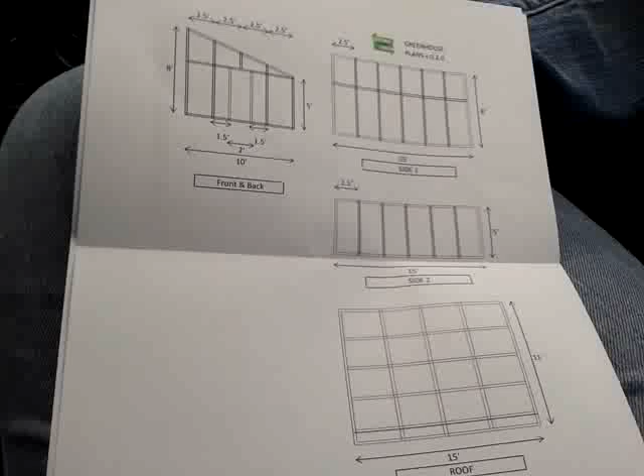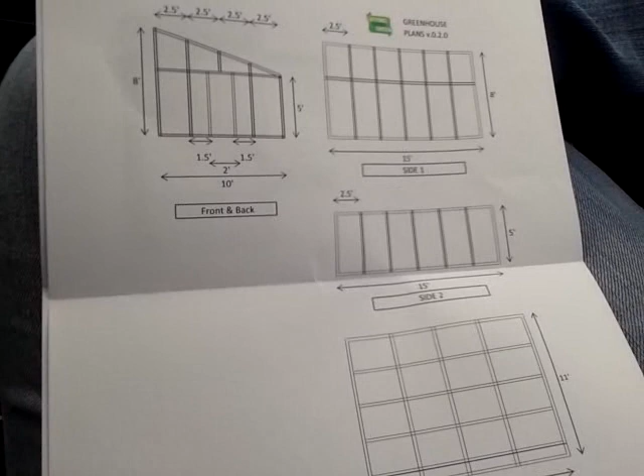Okay Randy, we're looking at some plans here. Can you tell us what we're looking at? Those are plans to our new greenhouse, a more permanent structure. With the old greenhouse, we're taking it down and rebuilding it as a permanent structure. Yes, and these are the plans.

Okay, where are we off to right now? Well, we're going off to a few places like Lowe's, Rona, and Home Depot to look at lumber. We are going to be getting lumber today. We're just going to go to whichever place is the cheapest, of course.

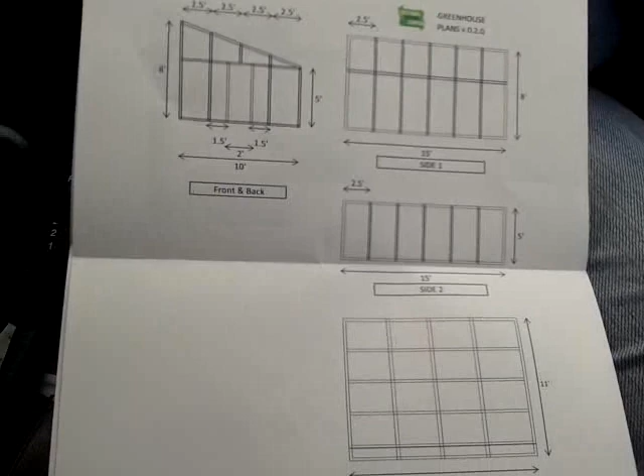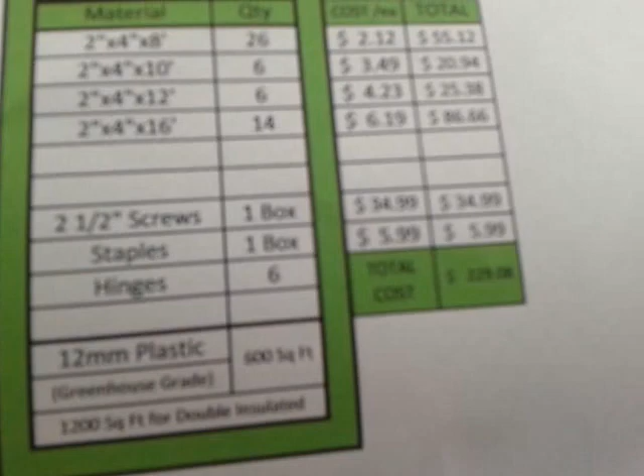Okay, we already sort of priced it out, right? Yep, those are prices at Rona from a few weeks ago, but wood prices change all the time. That gives you a guideline of what the cost of a permanent greenhouse is, if you're building it yourself out of lumber, plastic, screws, and everything else. So just over $200 is what we expect we're going to be paying today for lumber, screws, and all that stuff. Yes, that's what we expect to be paying.

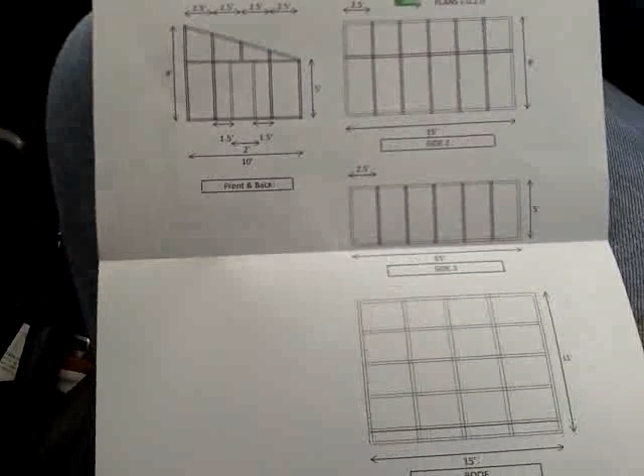Now, we do have some items which aren't on the list. We already have some of those items, so for somebody starting from scratch, we have hinges left over that we're going to be using on our new greenhouse structure. If you're looking here, show them where the roof is.

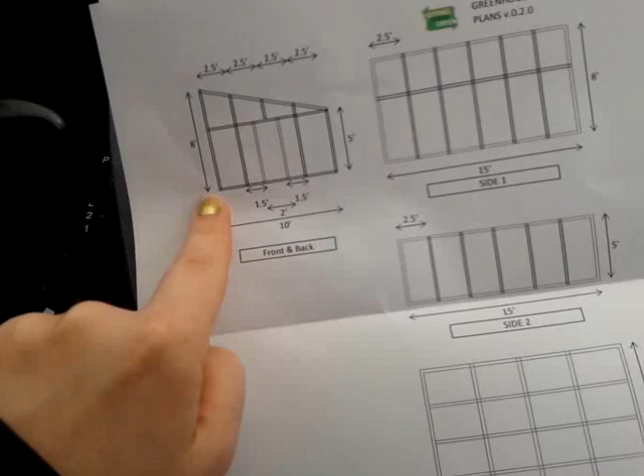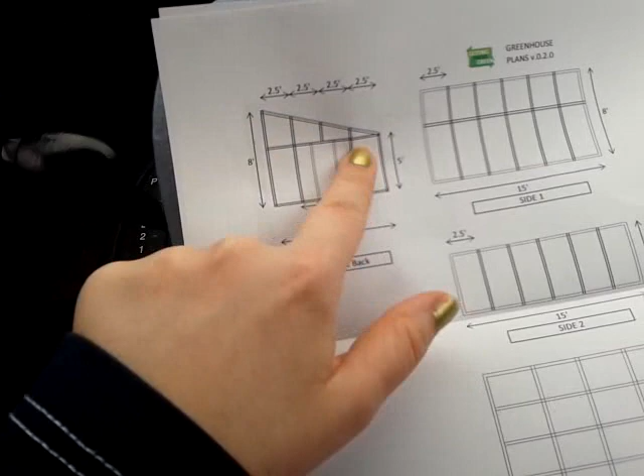So this diagonal line here is our roof. This is the front, looking at it face on, like where the doorway is. So we have one angle, rather than the peak triangle shape you're used to seeing on a house. Ours has one angle, that's it. The reasoning for that is because of the sun, which way it's coming up. It takes advantage of the sun, because the sun spends all day on this side, so it would be a waste of sun to bother putting a peak on the other side.

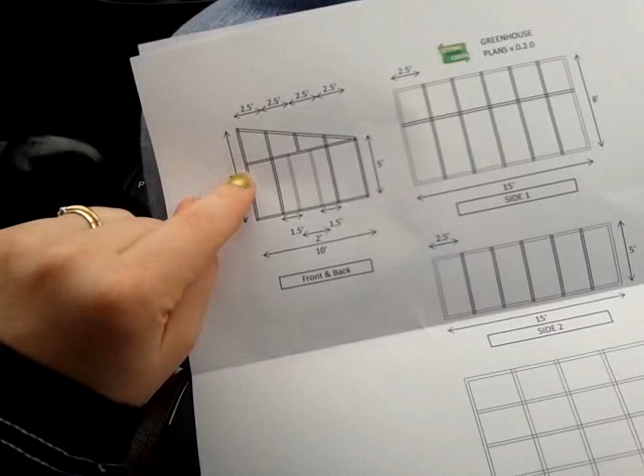And it makes it easy for water collection at the bottom when it rains. And right here, you're talking about having it open up at the top, the highest part? Yes. So there'll be a hinge over here, and it'll open here, for airflow and ventilation, etc.

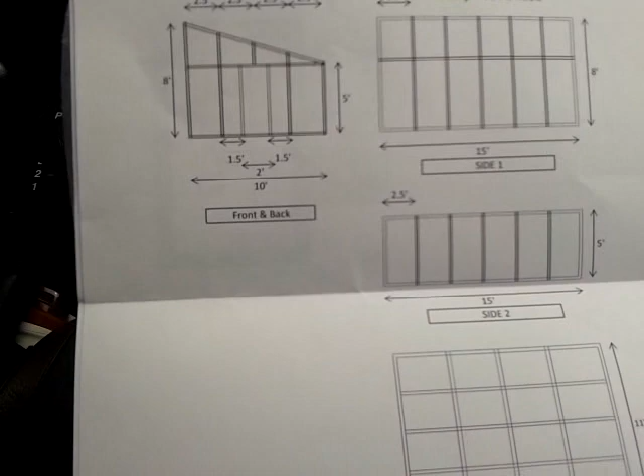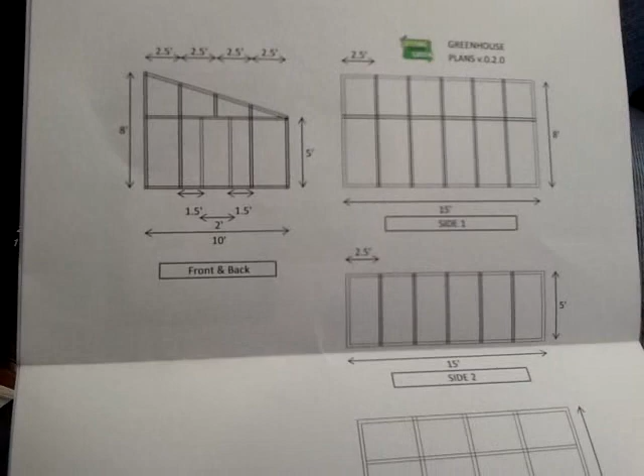All right, so that's the plans. We will make the plans available to you on our website. Once we've completed the greenhouse, we may make some minor modifications to these plans, and you can download them and build your own. We'll add all of the items that you need — this is just what we need for our project, but we'll add the other pieces at the end so you have a more complete list. You can certainly download that, take a look, it'll be in PDF format for you.

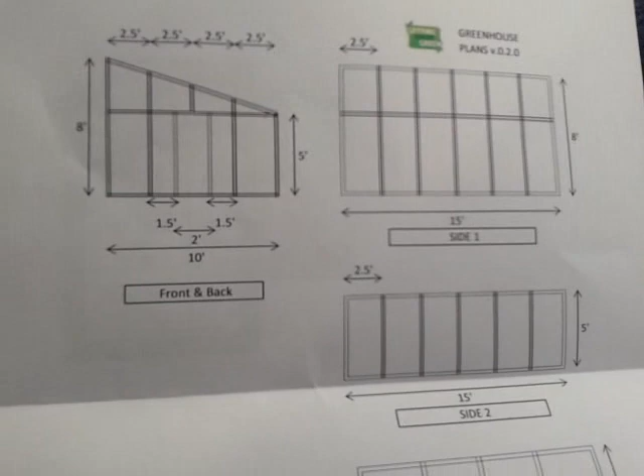You kind of want to look at a lot of different ideas when choosing your greenhouse style. As you can see, the last 2 years we had the PVC hoop house style, and it worked, which is why we've chosen to build a permanent structure now. The PVC hoop house was just more of an experiment to see how it would work, and over the past 2 years it worked great, gave us extended seasons. We've learned what crops to grow in the greenhouse and what crops to grow outside of it — a lot of that was a learning process, we didn't know what would survive and what wouldn't.

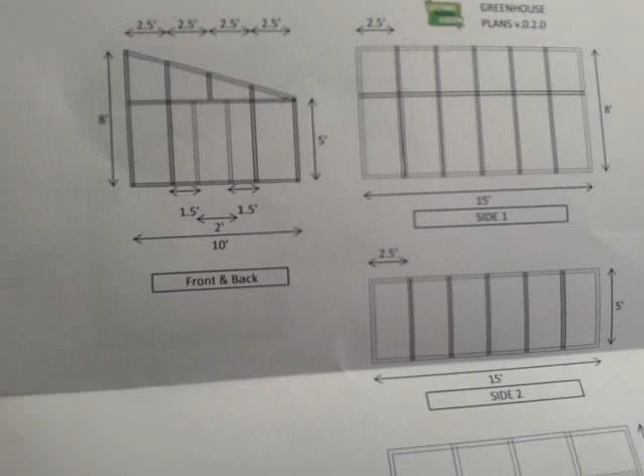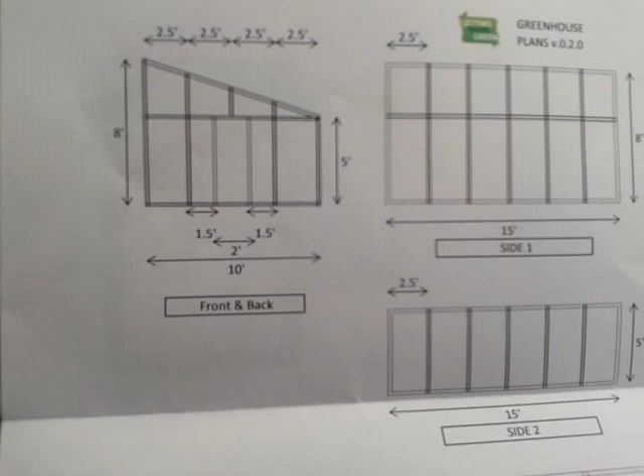A few surprises too, such as our kale in the greenhouse lasted all winter and is just going nuts right now. So kale in a greenhouse works. Yeah, I just ate some — I went in the greenhouse to look at stuff and ate a piece of kale while I was in there. It's really big right now.

Okay, so that's that. We're off to get some wood. All right, cool.